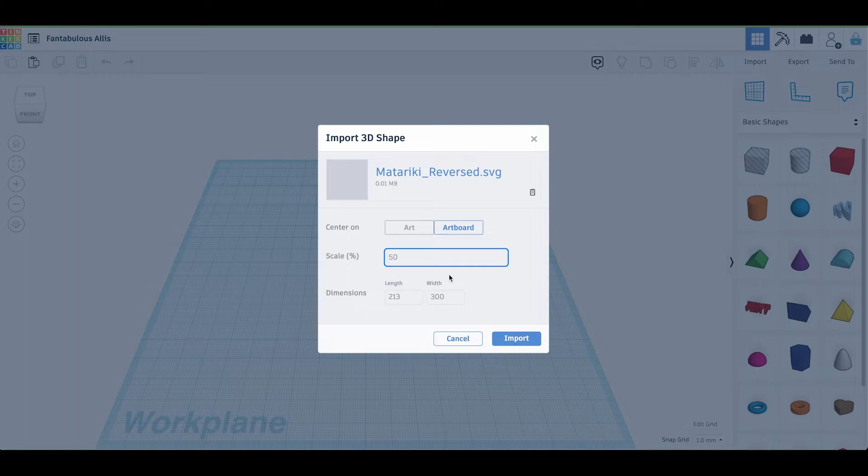I want it to be added to the artboard, scale at 100%. It's not very big. Well, let's make it a bit bigger. Let's scale it to 50%, I think is probably going to be better. Click import. Right, so what we see here is my Matariki has been imported as a model, which we don't want. So that's probably about the right size.

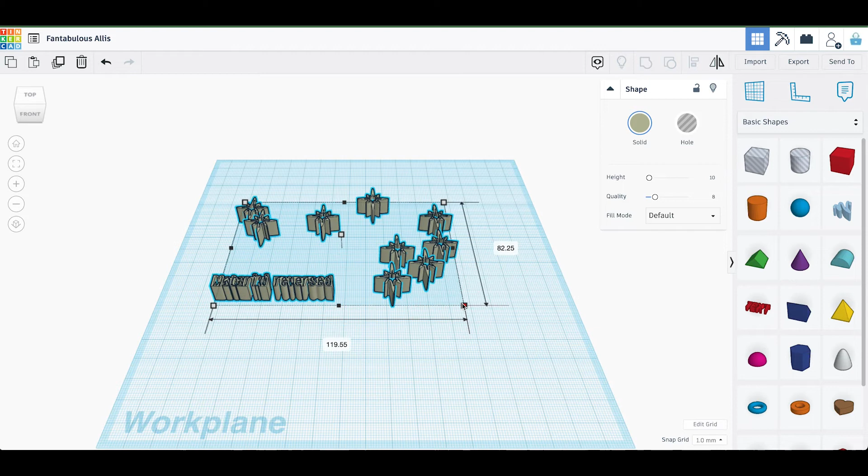If you're concerned about it being too big, we can scale it. If we look at this, it's 119.55 millimeters long, which is quite big. I'm going to scale mine down. Let's make this, yeah, that'll do. I think we'll just leave it about there for the minute and return. There. So now I can move this around, and it's a model and we want to trace it.

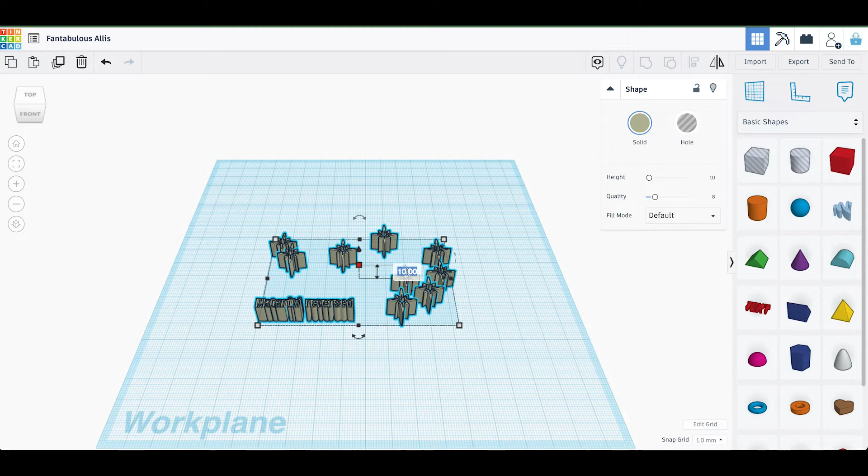This is already 10 millimeters high, so I'm going to change it to 1 millimeter high, because I only want to use the shape. Now what I want to do is put it below the plane so I can see it, but it's not going to form part of my model. So I'm going to click on this and go down below the model. Now it's 1 millimeter thick, so I want to go down 2 millimeters, -2, and click return. Done.

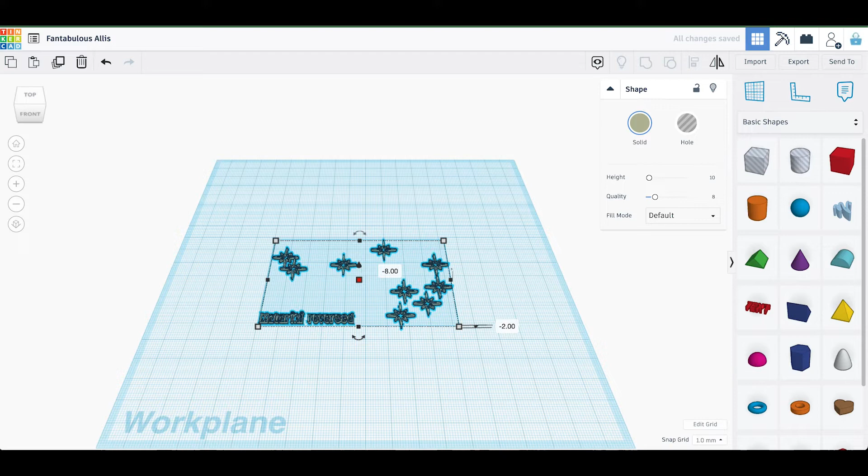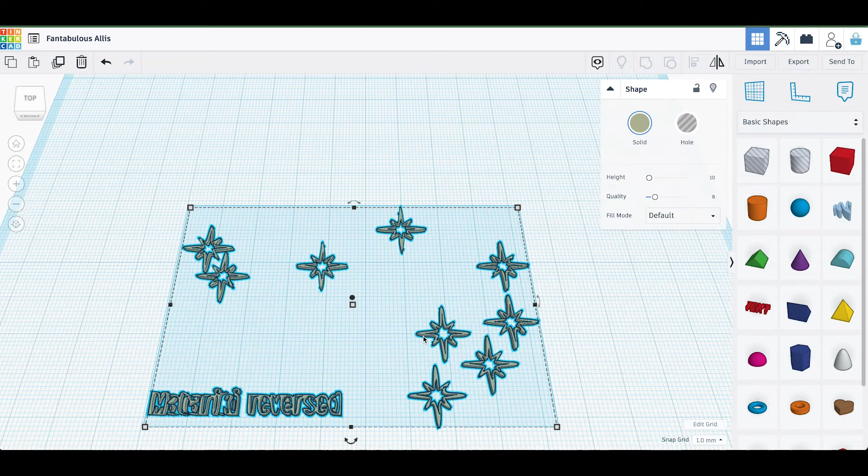So if I now scroll through this, you'll see my model is under the plane, and now it's ready for me to trace. I'm going to zoom into this, but I need to make my LED holder first, so I don't want this to get in the way. So I'm going to click on this particular model and lock it, and then once it's locked I'm going to hide it, and now we can make our LED holder.

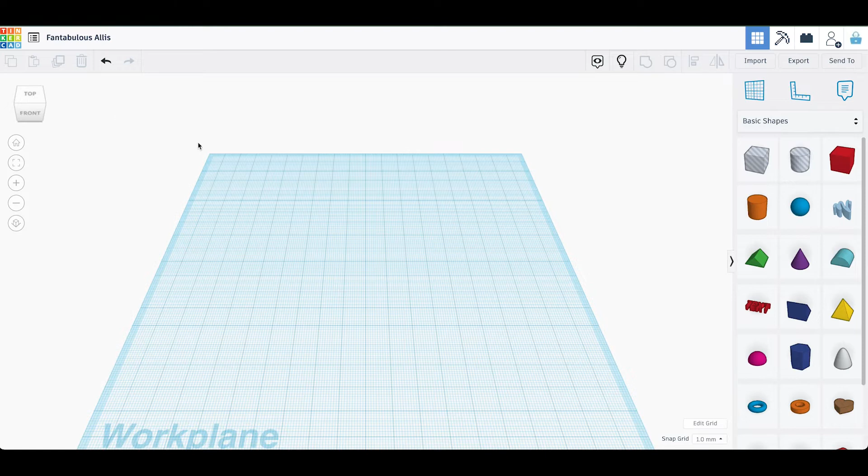So I've hidden the Matariki sign. Now if we want to get it back, click over here on the light bulb, click on this, and it will come back, and I need to click on it to highlight it and hide it again. Now we need to make the LED holder. We only need to make very few elements and then just copy and paste them and fit them together. So let's start with that.

I'm going to click on top here, the top view, and zoom in. What I want to make is a donut, so I'm going to use the cylinder tool and drag this out. The LEDs that I'm using in my model are 3 millimeters in diameter. You can get 5 millimeter LEDs, so you'll need to change your sizes accordingly. So don't copy exactly what I'm doing. You'll need to measure the resources that you're using, and that will become important in a moment.

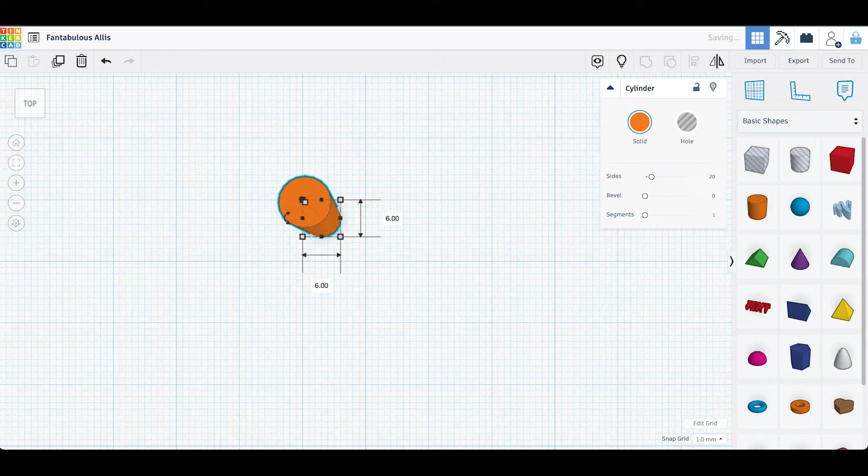I'll show you. So the first thing I need to do is change this. I want to make a 3 millimeter hole inside this, so I want to make sure that this is 6 millimeters in diameter in all directions. There you go, 6. Don't worry about what it looks like. I'm going to put 6 in here. And the height, I don't want it to be 20 millimeters, I want it to be 5. 5 is going to be my consistent height. And there is my shape. I'm just going to center it back over here.

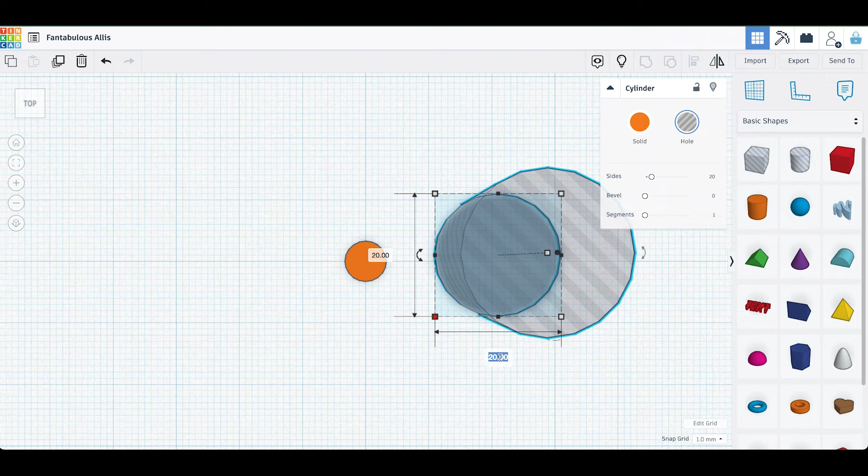Now I need to make a hole. So I'm going to grab the ready-made hole object, and I've already said that my LED is 3 millimeters in diameter, so I'm going to click on this and put 3 in here, and then do the same over here, click 3, and I'm going to drag this so it's roughly in the center. It's off center, and we're going to use the tools to make sure it's exact.

So highlight both of them, come across to the align tool here, or you can press L as a keyboard shortcut, but just click on the align tool, and then click on the center here and center here, horizontally and vertically, and that will have it in the center.

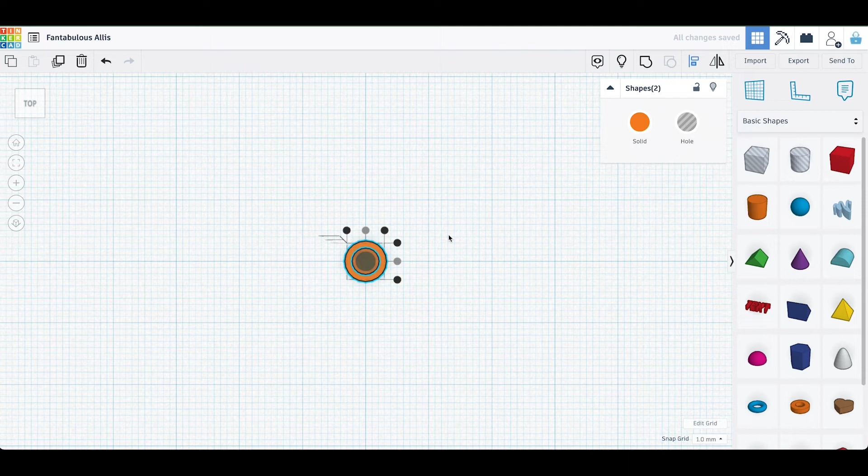So now I'm going to highlight both of them again, and use the combine tool over here, or group, and the hole has now been cut out of that shape. So if we look at this, orbit it slightly, we can see I've got a 5mm high donut tube, and that's going to be our basic building block.

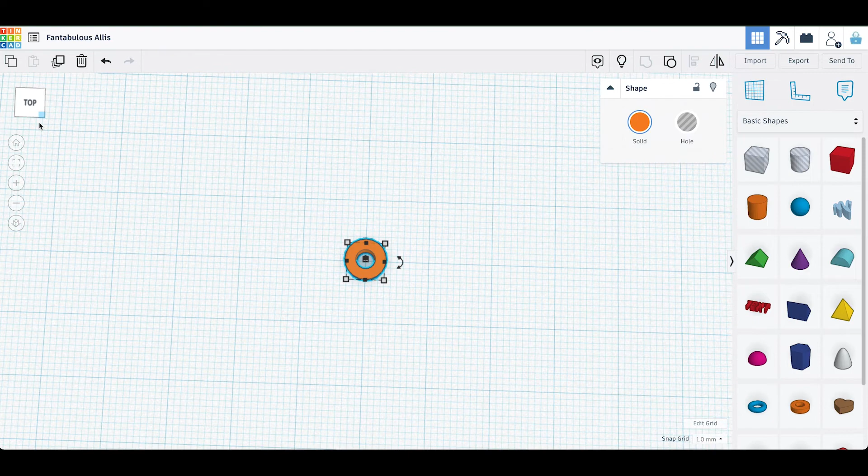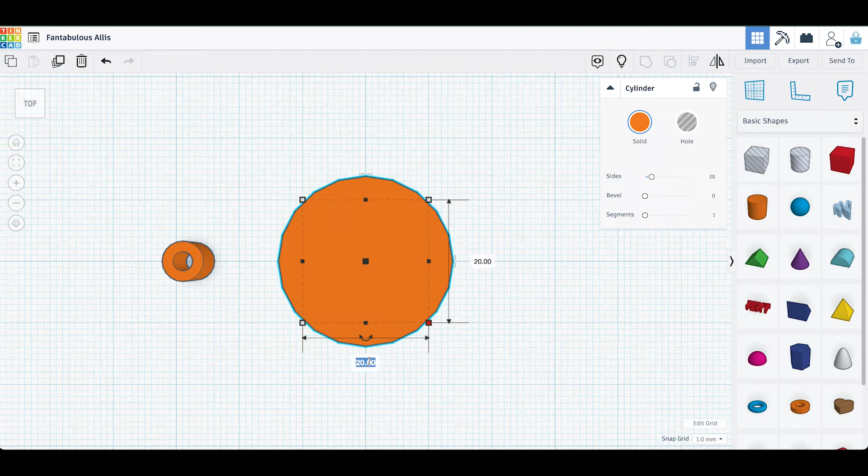So now I need to repeat that, and this is where again our models might differ. So I've got a 3mm LED, and I know that the wire that I've got means when I combine them together with the peg that I need to make, plus the copper tape that's going to be used to make a conductive connection in this hole, I need to make a hole in this new object that is going to be 4.14mm in diameter. So I'm going to make this 6mm again. So we'll just repeat this as a good way to show you what to do. Again, we want to make this 5mm high.

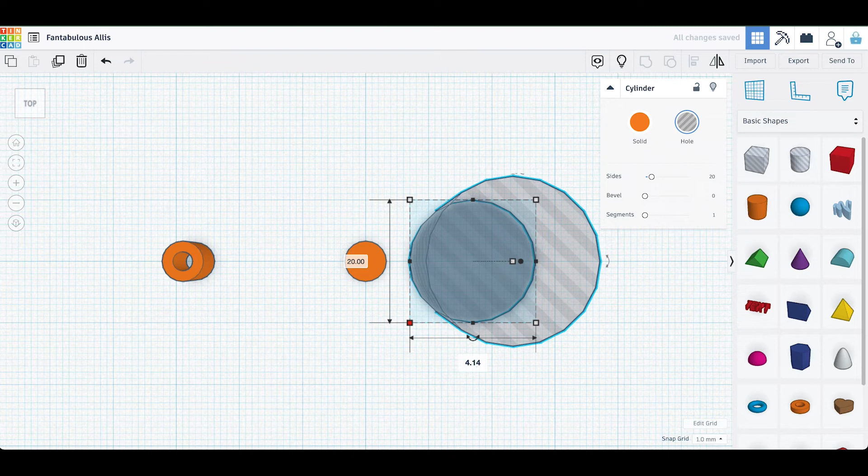And I'm just going to center this again on here, and this time I'm going to drag this out. I'm going to make a copy of this. So I want to make this 4.14mm by 4.14mm, and if you're not very accurate, it doesn't matter, because you can add more copper tape to your peg, which we'll do later, to actually thicken up the pin that you're going to make a bit later on.

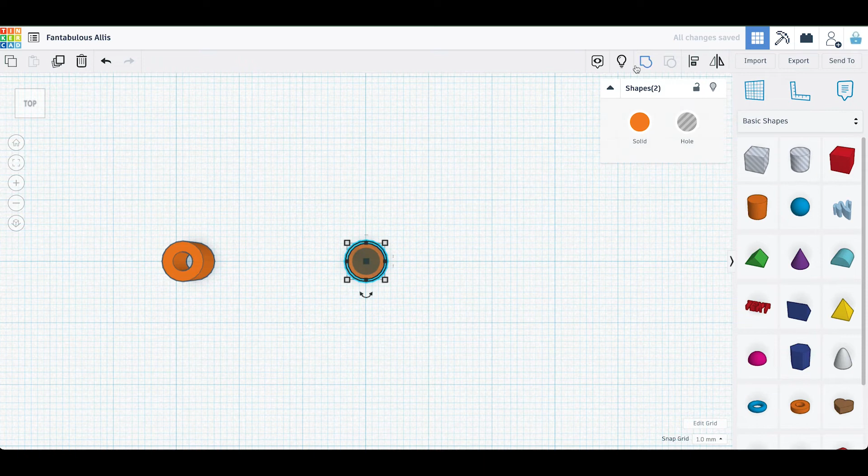So we'll highlight this, and we're going to come up to the align tool, click center, there we go, and I'm going to punch a hole in this. And let's go here, let's go group or combine, there we go. And so now I want to copy this, I need 2 of these. So I'm just going to drag this one out over to here, I'm going to put this one up over here, I'm going to put this one in the center.

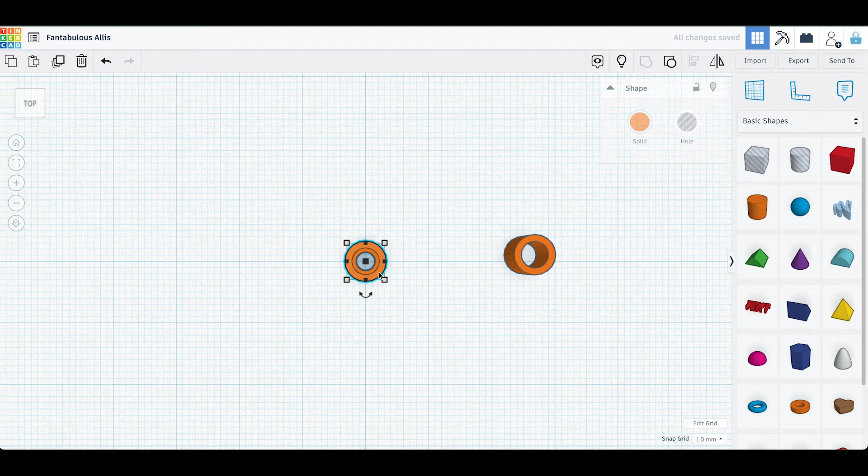So what I want to do now is I want to use this here, center them like that, and I want to click on this one, and I want to move it, in this case, whoops, I want to move it minus 15mm. Now you can change the size of yours, it doesn't matter what you do, depends on the scale of what you're trying to do. The more space you give yourself between the center hole and the outside points is going to be easier for you to wire things together. So I've chosen, for the size of my fingers, 15mm. So I'm going to go minus 15.

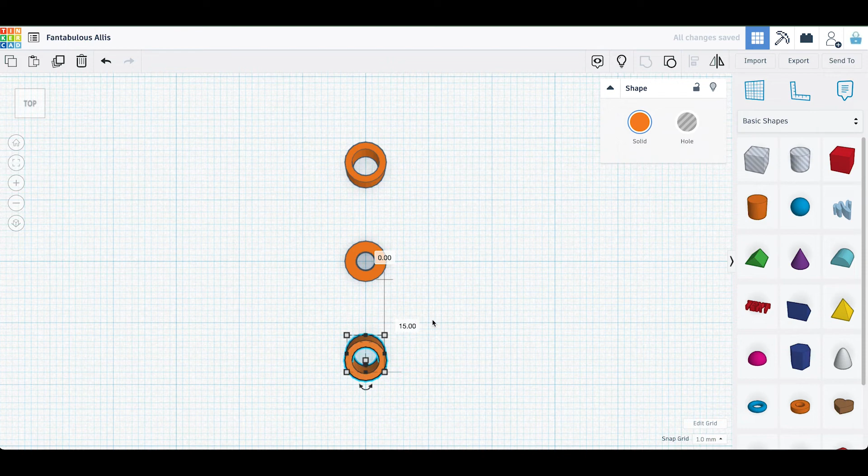Done, it's moved it there, and I'm going to do the same with this one just to make it nice and accurate, and I'm going to move it down, and this time it's going to be positive 15. And just to make sure everything's in line, I'm going to highlight all 3 of them and use the align tool, and when it's grayed out like this, they are in fact in line, so I don't need to do anything else.

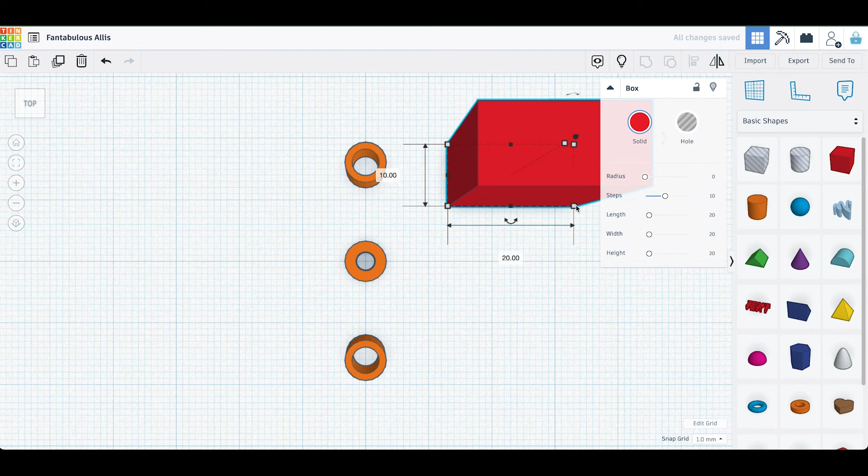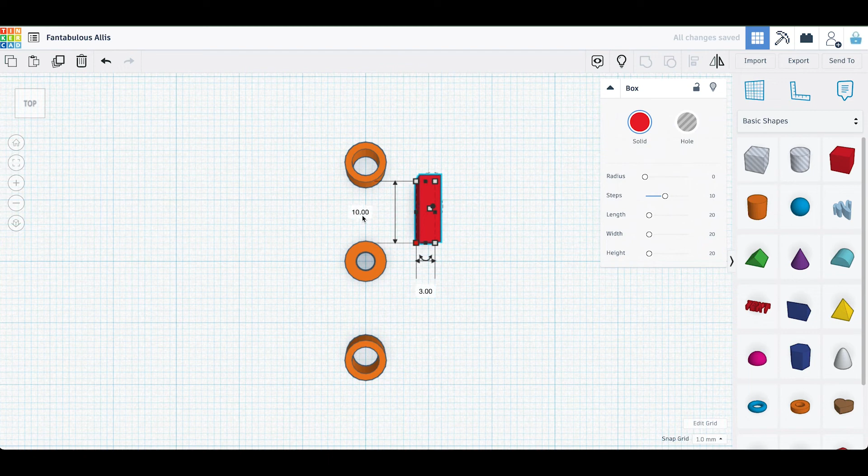Now I need to connect all of these together, so I'm going to grab a cube, and I'm going to guesstimate that this is going to be 10mm long. We can change it in a moment. I definitely know I want to make this 3mm wide, and I definitely want to make it 5mm high. So now I should be able to join these together. It's a bit tight, so I think what I'll do is I will change this to 11 and just see if I can put this in here. That's going to be a much better connection. Just need to make sure, there we go.

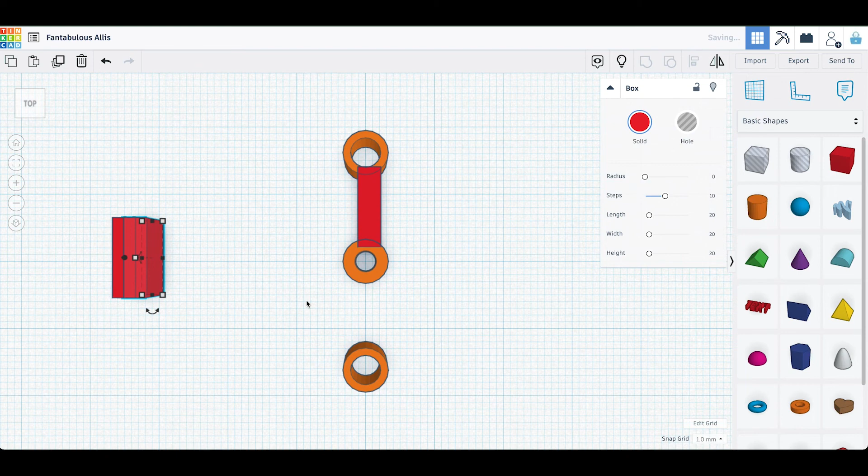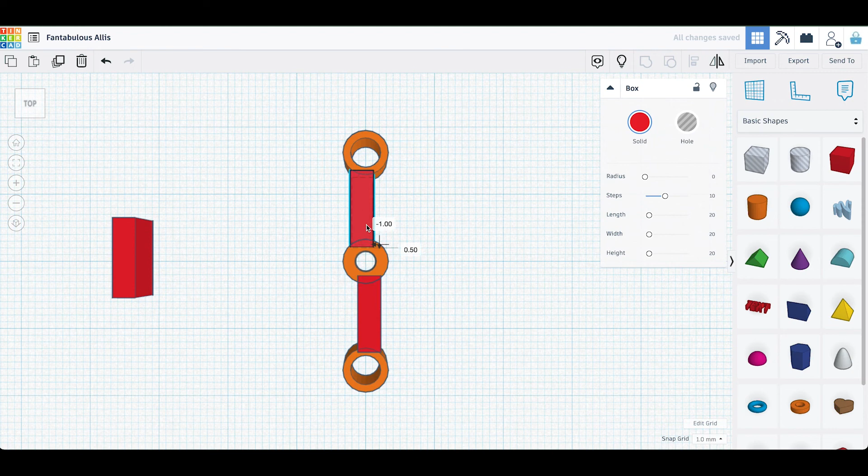Yeah, it's looking good. So I want to copy this, in fact make a couple of these, and I'm going to put this one over here like that. In fact, I'm a bit nervous that they're a bit long, so I'm going to make it 10.5. Yeah, I'm happy with that. I'm going to make this one 10.5 as well. So you can always change them around. I don't want a flat side in any of those circles, otherwise things won't fit. Yep, I think I'm happy with that. Right, so I'm not going to try and align these up, I just want to make sure they fit.

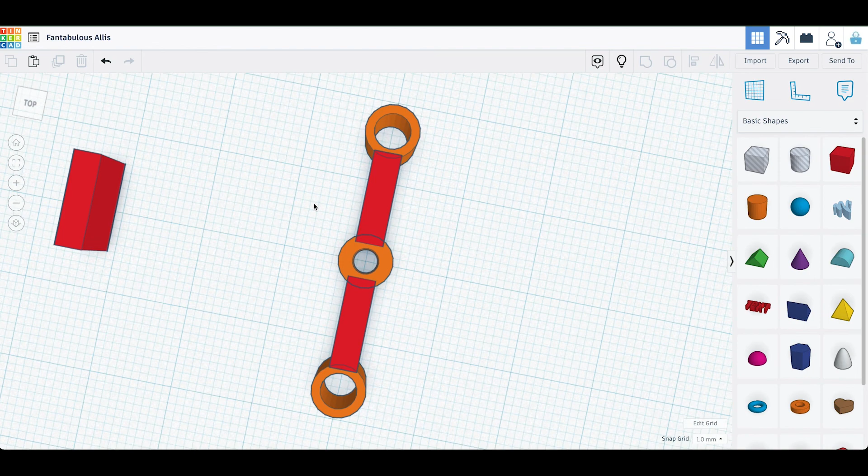Again, I'm going to highlight all 5 of those elements, use the align tool, and I'm going to get them all to align together. There. Now, I've started to make my shape. Can you see they're all the same size, all the same height, there's no gaps. The important thing to look at here is that you've got a nice connection between the 2 shapes. There's lots of solid shapes here because you don't want anything that's not connected, otherwise it's not going to work properly for you.

So once that's all done, I'm going to group those, and we've now got our first LED connector. And all we need to do now is make 9 of these. We can copy these, I'll just do 2. And we are ready to start laying out our Matariki LED plan.